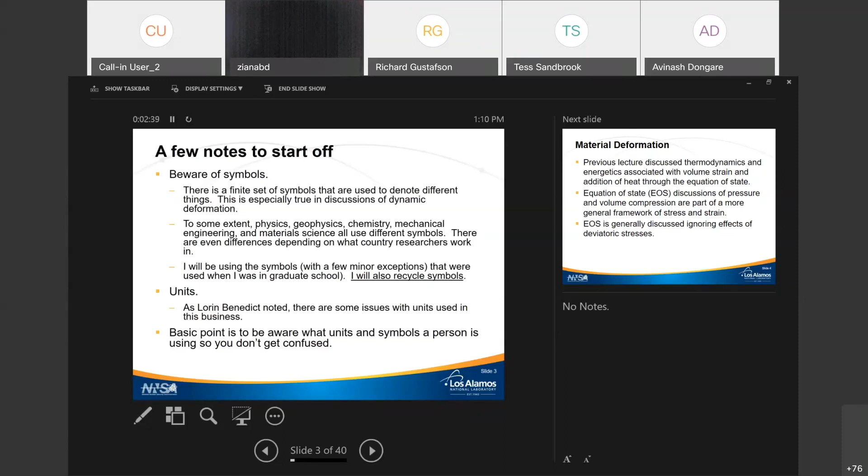Okay, so in the previous lecture, Lorin talked about thermodynamics and he talked about the energetics associated with volume strain and also the addition of heat in relation to the equation of state of a material. Equation of state usually involves pressure and volume compression. Those are specialized bits of the more general framework of stress and strain.

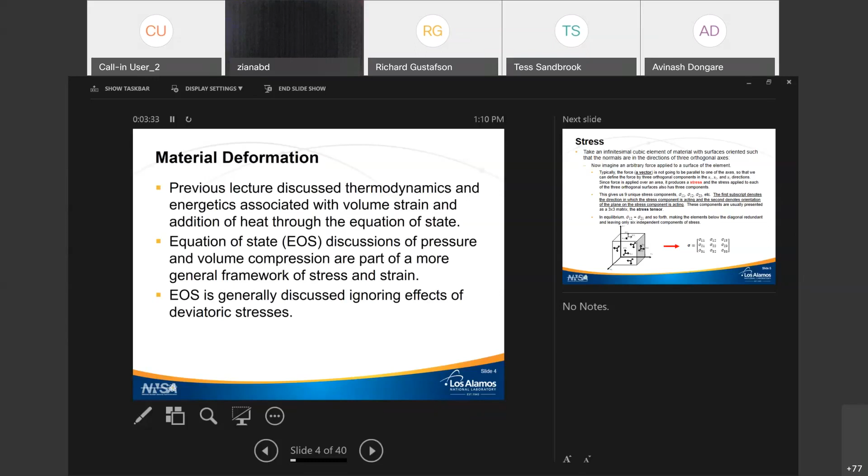The equation of state, as presented, generally ignores deviatoric stresses, and I think that some of the questions last week touched on that fact. This week, we will be discussing things that are dependent on the equation of state, but we go past that. So let's begin with stress. This is going to look very familiar to many people who've had a solid mechanics course, but in order to make sure that everyone ends up on the same page in terms of both the symbols and understanding what I'm talking about, I'm going to discuss stress and strain a bit first before talking about waves.

So imagine if you were to take a little cube of material and it's got surfaces, and the normals to those surfaces are 3 orthogonal directions. Lots of times lecturers will present them as X, Y, and Z, because when we get into talking about the matrices or the tensors that go along with these directions, generally they use numerical subscripts. I'm going to stick with the numerical subscript. So what would be X is going to be X sub 1. Y would be X sub 2, and Z would be X sub 3.

Now, if you take a force, keep in mind a force is a vector. It's got both direction and a magnitude, and you apply it to that surface, you end up with a stress. The stress is the force divided by the surface area. And because that force can be in any random direction, it typically isn't going to be aligned with one of our 3 orthogonal axes. And therefore, we can break that vector down into three components that are orthogonal in the x1, x2, and x3 directions.

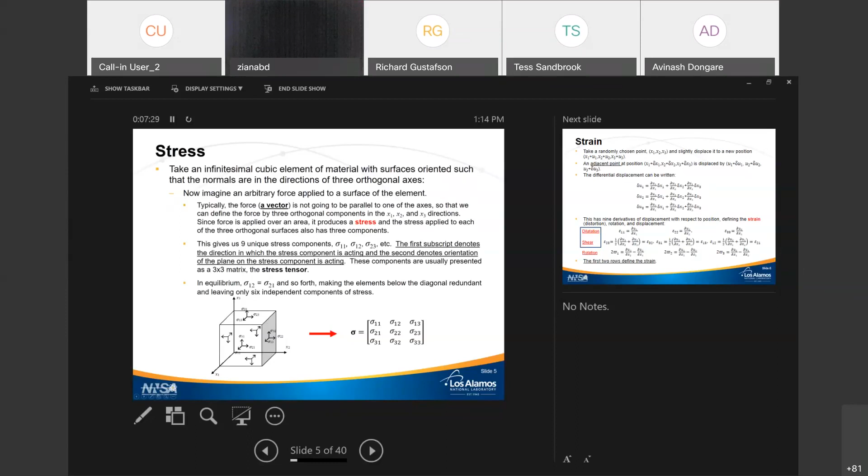Now, the whole purpose of what we are talking about in this course, we're talking about deformation of materials. I, in particular, am talking about the deformation of materials that results from stresses, and the deformation is called strain. So now, if we take our little cube of material and we pick some point inside that cube, and it has some position in our coordinate system, and we very slightly displace it. We displace it by a certain amount u1 in the x1 direction, u2 in the x2 direction, and so forth, and it ends up in a different place.

Now, if we take a point that's very close to that point, offset by delta x's in the 1, 2, and 3 directions, and we displace it, it will be displaced maybe by a very slightly different amount, so that in the x1 direction, instead of being displaced by u1, it's displaced by u1 plus delta u1. If we shrink these very small differences down to the limit, then we get differentials. And we can write these deltas as the partial derivatives.

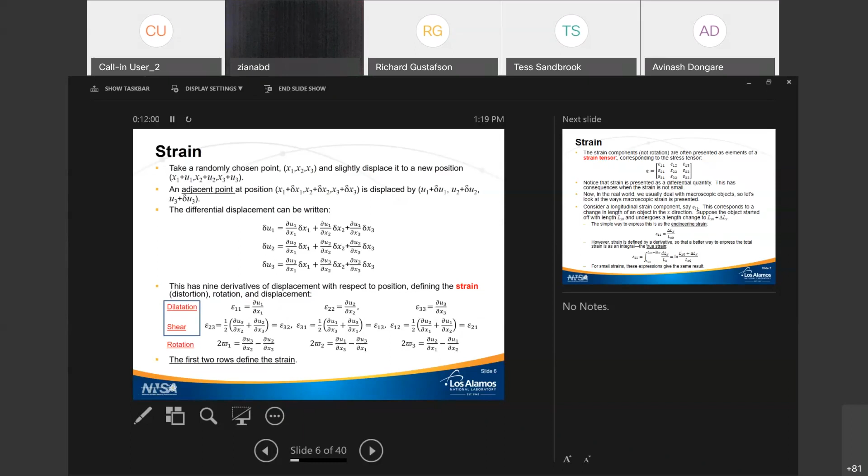So, as I pointed out, these things can go into a tensor. It looks very much like the stress tensor. The subscripts have almost the same meaning, because now we're talking about shears. But again, the plane that the force is being applied to, or in this case, the deformation is occurring in, is going to be the second subscript, and the direction of that deformation is going to be the first subscript.

Okay, strain is a differential quantity, and this has some consequences when the strain's not small. For most of this talk, we're going to think about situations where the strain is very small. Now, if we look in the real world, though, we deal with macroscopic objects. And so when you go read a paper where somebody has actually performed an experiment and presented a strain that has occurred in their sample, they're talking about something that's big enough to be measurable. And so just a very brief divergence from the main part of this talk

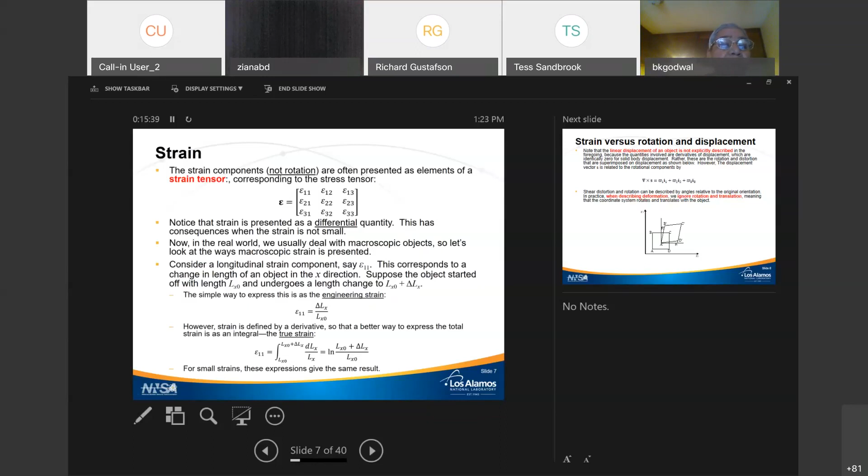The other thing I wanted to point out is that linear displacement of an object we aren't talking about. Rotation we aren't going to talk about, but this is just showing this is the displacement vector, and here's the curl quantity. It's related to the rotation. And that's all I'm going to say about it. We don't really need to worry about this for the purposes of this lecture.

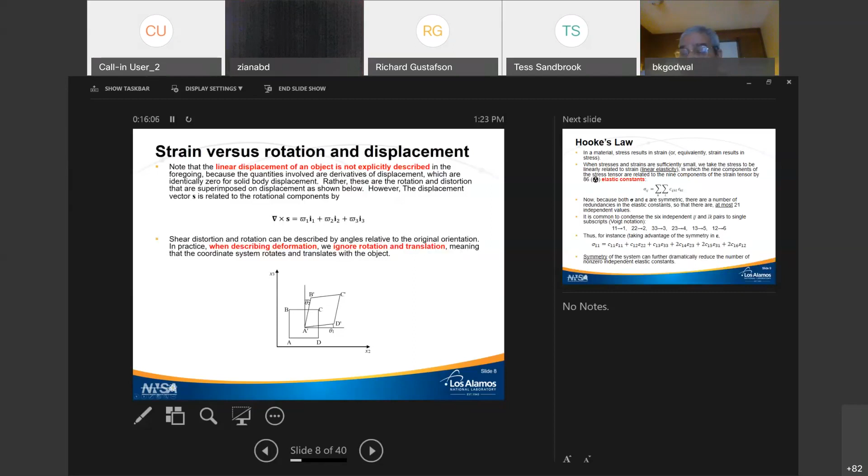Now, in high school physics or freshman physics, you probably dealt with problems where you took a spring and you stretched it or you compressed it, and you found that the force of that spring was equal to some constant called the spring constant times how much that spring was compressed or stretched. That is called Hooke's law.

Now, in solid mechanics, continuum mechanics, we have the same sort of issue where we can take stresses and strains and relate them by ratios. If those quantities are sufficiently small, then whatever that ratio is can be considered to be a constant. And we call that an elastic constant.

And when these elastic constants are constant, then we term that particular situation linear elasticity. Now, in linear elasticity, we take our two 3x3 matrices and we relate them. So each component of the stress tensor has a relationship to each of the 9 components of the strain tensor.

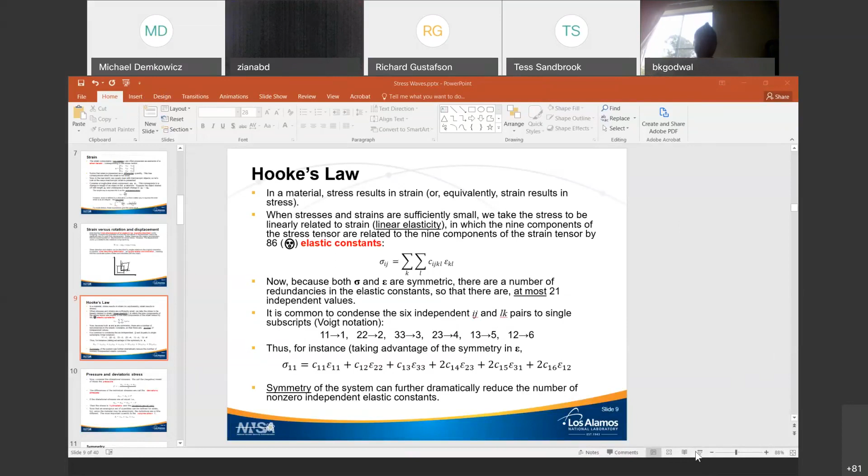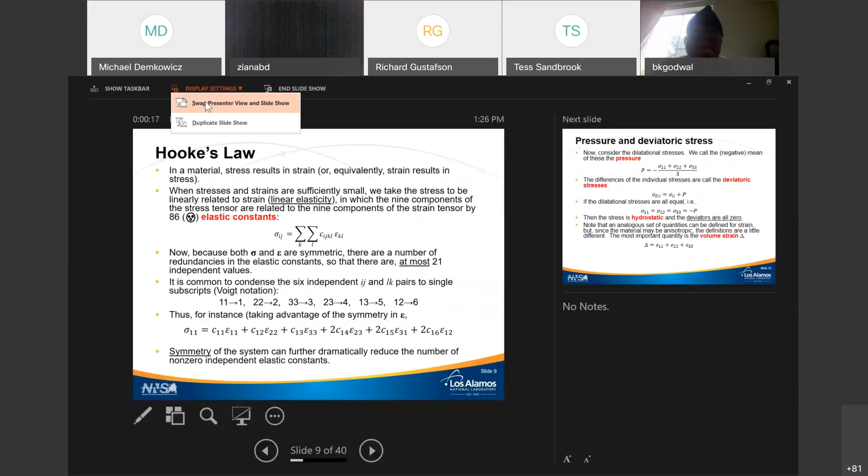And when you take that... Bill, do you mind if I stop you for just 1 second? We're getting a lot of requests to ask you to click on the display settings menu on top of your screen and swap presenter view and slideshow. So just start up the presentation in PowerPoint, enter the slideshow view, and on the top there should be a menu that says display settings. Press that and swap. Perfect. Can you see my cursor still? Yes, we can. Okay, because I'm using a double screen. Let me get things out of the way here.

As I was pointing out, the 9 components of stress are related to the 9 components of strain by 81 elastic constants, and that's a lot. The normal way is you take sigma sub ij, and it's related to each of the epsilon sub kl by a C sub ijkl. Fortunately, because both the strain tensor and the stress tensor are symmetric, a lot of redundancy exists in these elastic constants, so that there's actually only 21 independent values. That makes life a bit easier.

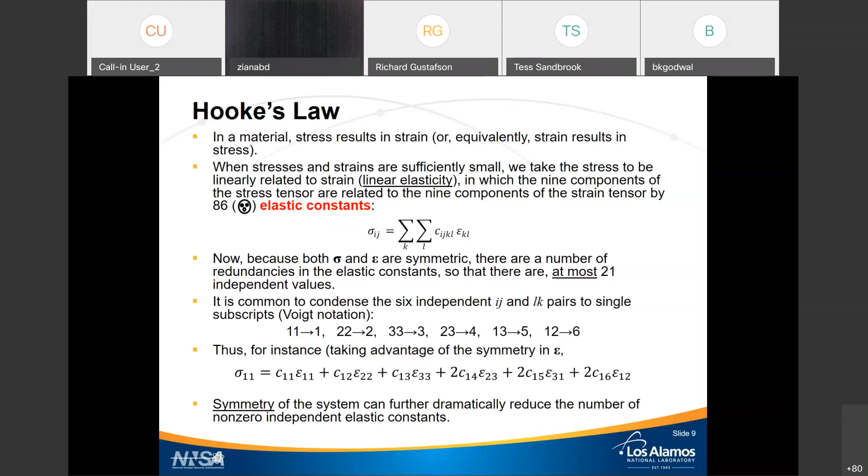One other thing I should point out is that in our everyday lives, we don't think about stress per se, we think about pressure. The pressure is related to the dilatational components of the stress. It's the average of the dilatational components in the 3 different directions. There's a negative here because in strength of materials, the convention is that stress and strain are positive when you're stretching or pulling on the material, and compressing a material, the stress and strain are negative.

We're going to change those definitions next week, but for this week we will stick with the convention people normally work in. The differences between these individual components and the pressure, keeping in mind that the pressure is the negative of these, is called the deviatoric stress.

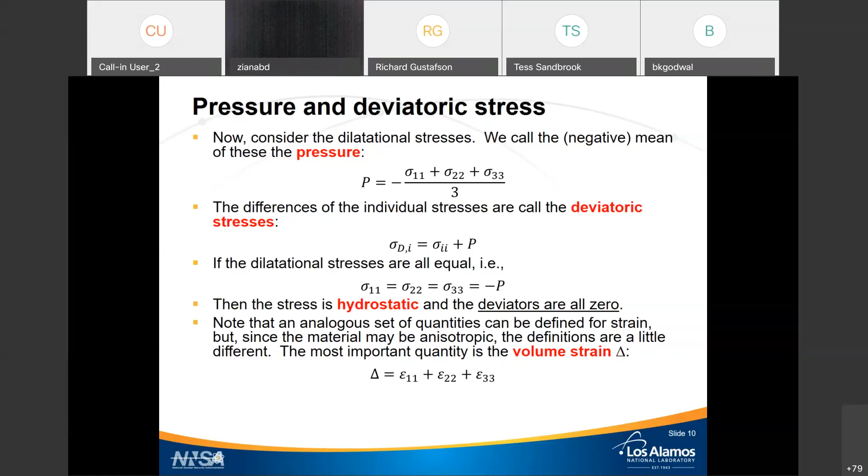Now, I said symmetry helps. In some cases, symmetry helps a lot. So if you have some material where there is no special symmetry, so in crystallography, we'd be talking about a triclinic crystal, where none of the crystallographic axes are orthogonal to each other, where none of the unit cell lengths are the same. So there aren't any repeated properties from one direction to another direction. You're just stuck with this thing not having special symmetry. In that case, you're stuck with all 21 elastic constants in order to completely describe the material.

Fortunately, most materials are not that asymmetric. Most materials that we deal with have inherent symmetries that result in some of the elements of the elastic constant matrix, which if you were to go in and add it all up, it's a 6 by 6 matrix. That's 36 separate components. Of course, like I pointed out, it is symmetric, but it results in some of those elements vanishing or being redundant.

In particular, there's actually quite a large class of materials that we call isotropic solids. Isotropic solids have properties that are independent of direction, and they only have two independent constants that we normally call Lamé's constants, and they can be expressed in terms of the elastic constants, C11, C13, C12, so forth and so on. You can see here, all 6 of these are equal to lambda. The 3 of these are equal to mu, and then lambda plus 2 mu actually equals these right here. And you might notice that these are the constants that correspond to dilatational strain in response to dilatational stress.

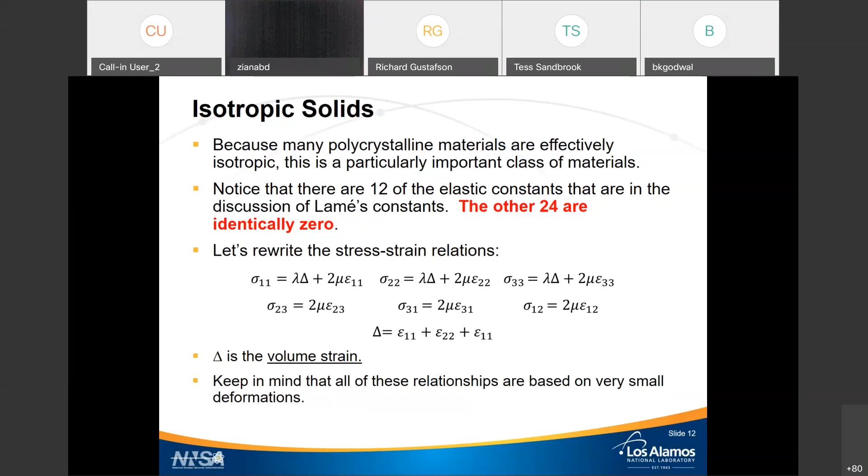Now, let's take a particular special case of an isotropic solid under what we call uniaxial stress. So we're going to take a block of material and we're going to squeeze it with a stress that's applied in only one direction, along one of our principal axes.

We're going to require the stresses on the sides to equal 0. Well, you know, if you take a marshmallow and you squeeze it with your fingers, it's going to bulge out. And so the lateral dimension is going to increase as the linear dimension decreases.

And it has those changes in dimension; the strains associated with those are going to have to satisfy this set of equations right here. The 1,1 component of stress is going to equal this, and the other 2 dilatational components of stress are identically 0. So you have to make all the different strains work together to satisfy these 3 simultaneous equations.

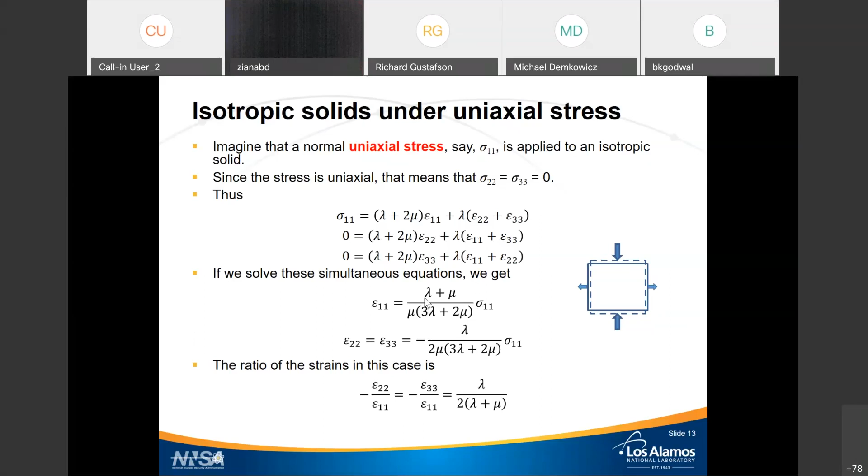Now, it turns out that these, while not really difficult, these particular equations have a lot of writing that goes along with them. So for convenience sake, it's common to define 4 elastic constants for isotropic materials. One of them actually is an elastic constant that applies to all materials, but right now let's stick with isotropic materials in terms of Lamé constants.

The first is Young's modulus, which is this right here. Second is the bulk modulus, and we'll be talking about it a good deal more. Third is the shear modulus, and it turns out to be exactly the same as our quantity mu. And finally is something called Poisson's ratio.

And if you go and look at what these ratios are, the Poisson's ratio is related to the differences in strain. Actually, those should be stresses. I'm sorry, I have made an error there. Oh, I'm sorry, I'm getting ahead of myself. The Poisson's ratio deals with the ratio of the lateral expansion of the material, if you will, to the longitudinal contraction. And Young's modulus is just the ratio of the stress to the strain.

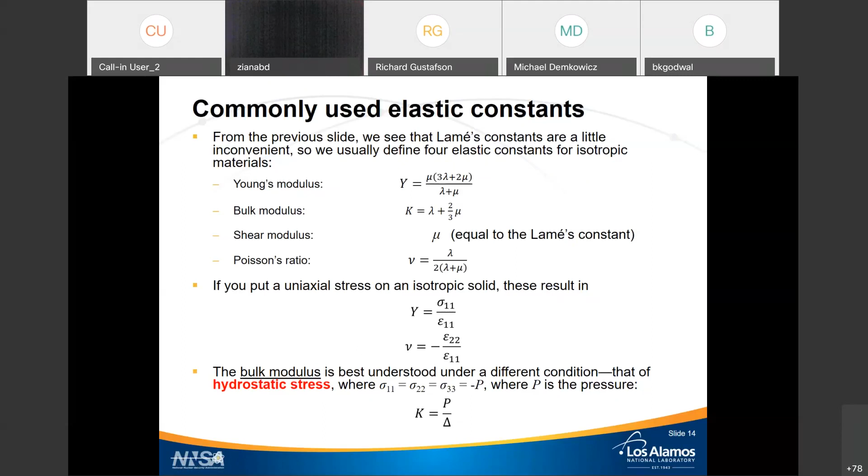Now, there's a different condition called uniaxial strain. In that situation, which is the normal situation when we're dealing with stress waves, you have some extended material. You've got a big chunk of material, and you're dealing with what's going on inside of it, where if you squeeze it in one direction, it's surrounded by more of the same material, so things can't get squished out the side. Therefore, the strains in the lateral direction are 0, and the strain in the longitudinal direction is non-zero.

Well, now you have to simultaneously solve the equations that will give you that. So what you'll have in a situation like that is the longitudinal stress is going to look like that, and the lateral stress is equal to that. Notice that all the other strains, 2,2 and 3,3, are 0, so they don't enter in there.

And in terms of our elastic constants that I said are a bit more convenient, the longitudinal stress is related to the longitudinal strain by this quantity here, which involves the bulk modulus and the shear modulus, and the lateral stresses are related to the longitudinal stress by this ratio involving Poisson's ratio.

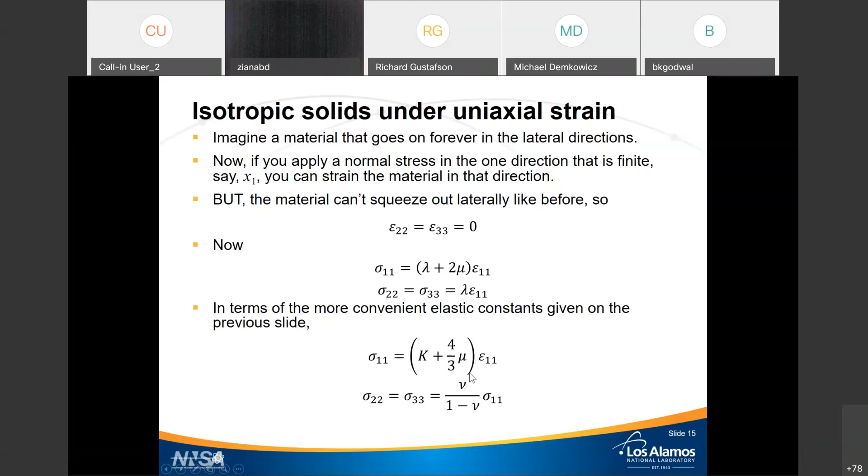Now, not all materials are isotropic. So let's talk briefly about the next step up in asymmetry. There are materials that are called orthotropic solids. An orthotropic solid has 3 orthogonal planes of symmetry, but the properties may not be the same in those different directions.

I'll just mention that, of course, a very large set of materials, for instance, lots of salts, lots of metals, are isometric. In other words, their symmetry is cubic. They have 3 fourfold rotational symmetry axes, and the properties along those different axes are the same.

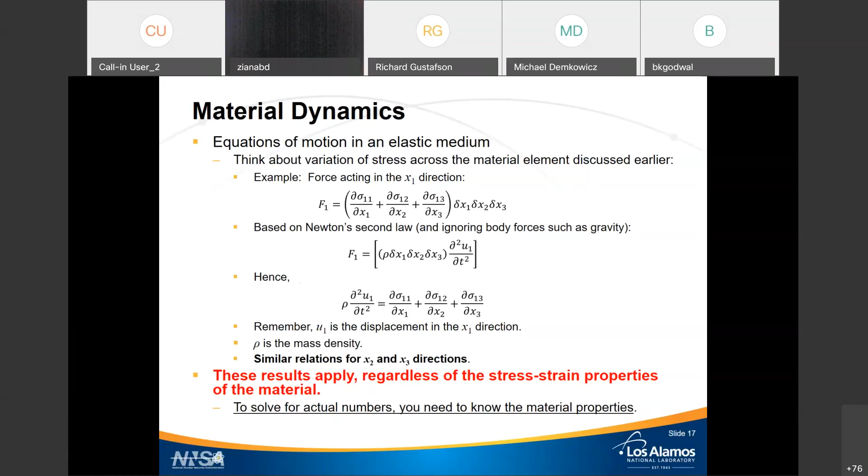Now, what happens if we have something that obeys these equations and we do the following? Let's take a block of this material, and only on one surface, not on the opposite surface, so now we're going to have an unbalanced situation. Only on one surface, we apply some time-varying force. Okay, because that stress is unbalanced, that's a net force, things are going to move. We accelerate the material. So the atoms at that surface are accelerated, they move, so that there is a corresponding time-varying strain.

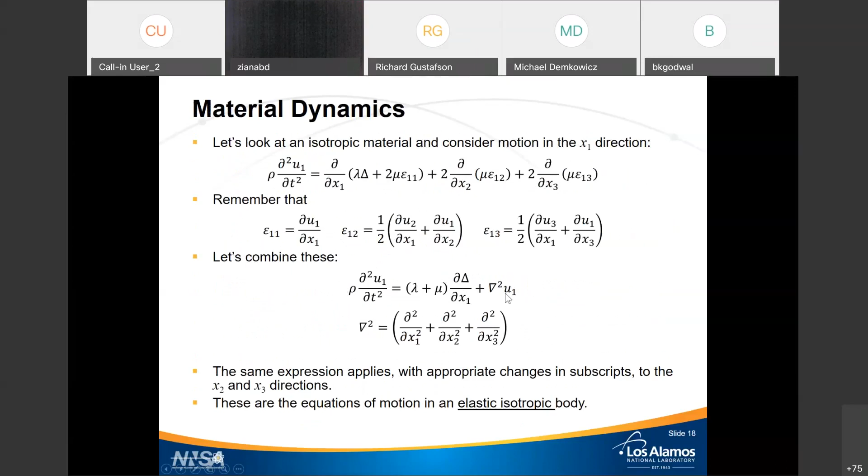That is a wave. Now let's look at this wave in terms of those equations of motion that we had on the previous slides. Now, if we take all three of those equations of motion, in the x1, x2, and x3 directions, and we differentiate them with respect to x1, x2, and x3 in those three directions. So for instance, this one would be differentiated with respect to x1. We differentiate them, and we add them all together, and you get something that looks like this.

Here, remember, this is our volume strain. We've got Lamé's constants here. You may remember that this is what the stress looked like relative to the strain in the uniaxial strain condition. And for those of you who've done a lot of electromagnetism work or dynamics work, you might recognize this as being the wave equation. A second derivative of some quantity with respect to time is equal to some constant of proportionality times the second derivative of that same quantity with respect to position.

In this case right here, this is a wave equation where dilatation is moving through the medium with a velocity that's equal to this quantity right here. And you'll notice this right here is our stress again, or our stress ratio to the strain. Here's our mass density, and it's a square root.

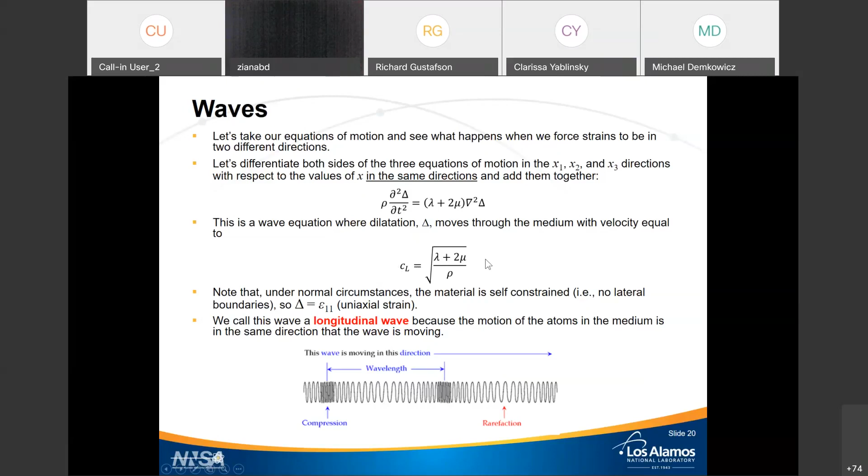And since it's a longitudinal wave, that's why I called the velocity C sub L. Now, because the lateral strains are zero, and the lateral derivatives therefore are zero, we can think of any particular localized portion of the wave as planar. And so we can now write that wave equation to look like this. The general solution for that wave equation is going to look like this. Keep in mind that waves don't have to be sines or cosines. There's a general solution that involves a spatial position plus the wave speed times a time position. And there are two possible solutions, one for waves propagating in the positive direction, and one for waves propagating in the negative direction. What you can see is, except for a constant offset and, of course, the scaling factor.

Let me see here. Okay, for whatever reason, my cursor moved on me. Can you still see the cursor? Not anymore. Okay, let's see here. I'm not sure what I did. Let's go back. Okay, my cursor went away, so I'll have to try and make things clear enough as to what I'm pointing at.

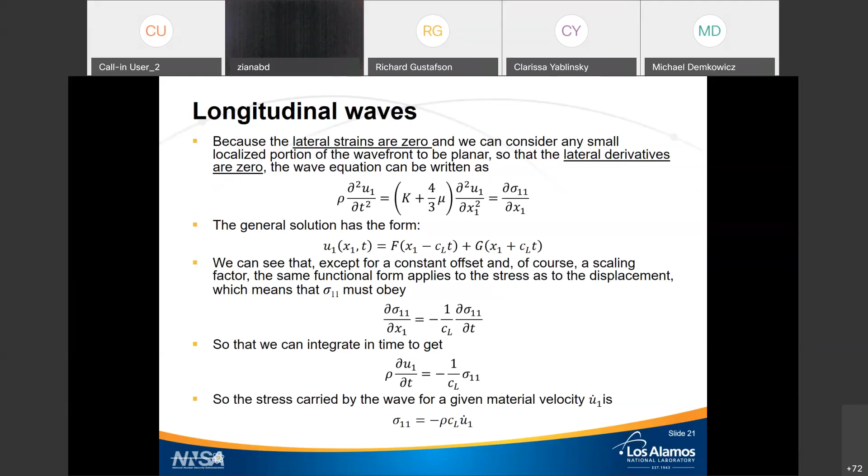Now, what about the case where we force the volume strain to be 0? So there's no dilatation to speak of. If you do that, then you have these equations up at the top that relate velocities, or actually accelerations, in the U1 and the X1, 2, and 3 directions to the spatial derivatives of the velocities.

Now, because of the way that the full equations of motion work, and because the material is self-constrained, we can't have longitudinal strain. What we will get is another wave equation. These are all wave equations, but they have a different propagation velocity, equal to the square root of the shear modulus divided by the density. Those are called shear waves.

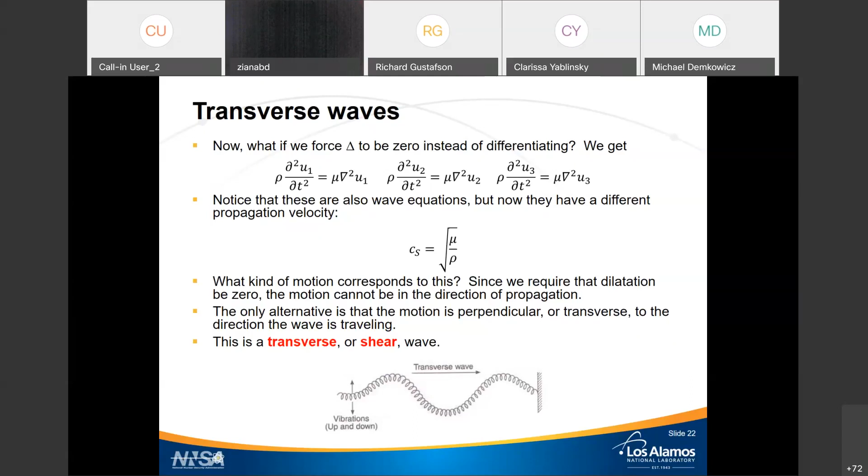Now, imagine a longitudinal wave carrying a longitudinal stress, sigma, in an isotropic medium. What are the stress deviators? Okay, in an unbounded medium, the stress deviators are essentially 1/3 of the total stress. In a bounded medium, and our self-constrained medium, the uniaxial strain case, the stress deviators have to basically balance the amount of expansion you would have gotten, and we dealt with that earlier.

The lateral stresses must exactly equal the stress required to balance the lateral strains so that there are no lateral strains. And so you have the material squished in one dimension. Now, because there is a difference in stress between the longitudinal and the transverse directions, there is an inherent shear stress and also shear strain at the microscopic level that go along with this.

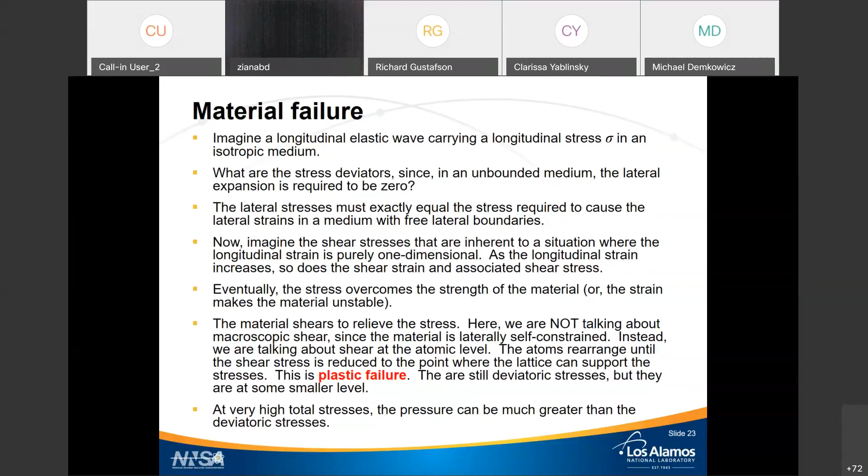At very high total stresses, think very high pressures, quite often the pressure is much greater than the deviatoric stresses. And in such situations, as you will find out next week, it's common to ignore deviatoric stresses. But in a material that has failed plastically, where if you try to apply more shear stress, the material just flows, then it's behaving like a fluid rather than a rigid solid. This condition translates to the shear modulus being equal to 0.

In that case, the shear wave or transverse wave velocity would be 0. So there is no transverse wave. And the longitudinal sound speed becomes this quantity c, which is the square root of the bulk modulus divided by the density. That's a bulk wave. Bulk waves occur in fluids. They're really the only kind of body wave or interior wave that a fluid can support, but they also occur in solids that have failed plastically.

Okay, I've talked about mostly isotropic materials. I should point out that, and I think I left off a few terms in the example of the orthotropic solid here, if you take a material that has properties that depend on direction, then wave speeds, stresses, all those things will also depend on direction. And the strains, the wave speeds and all are going to be related to the stresses by whatever set of elastic constants applies to that material.

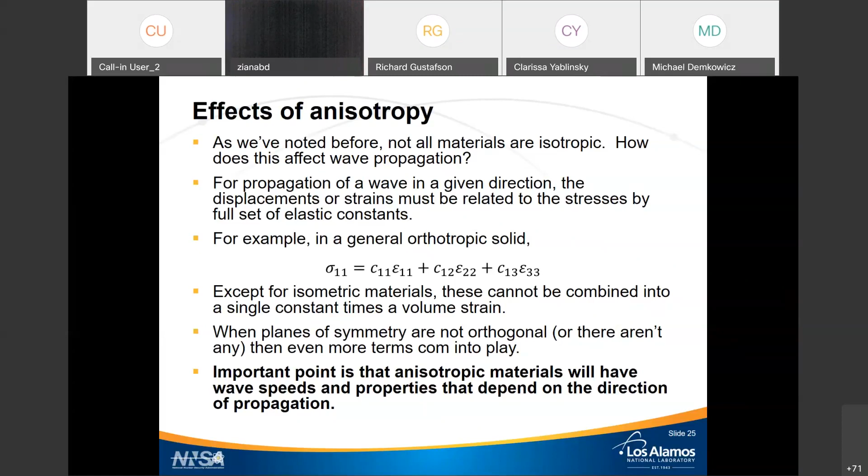The important point here is that anisotropic materials exist, and they will have wave speeds and properties that depend on the direction of wave propagation. Now, materials don't go on forever. Sooner or later, a wave hits something. Either it hits another material or it hits the edge of the material it's going through, and there's nothing beyond that. What happens to the atoms, to the wave?

Say it hits what we call a free boundary, where the last layer of atoms in the material is all there is. There's nothing beyond it. The wave can't just disappear. It's carrying energy. It's carrying momentum. It cannot just disappear. But at the same time, at that free surface, there's nothing beyond it. There can be no stress where there is no material. And so we have to think about, how does the material behave when it hits that boundary?

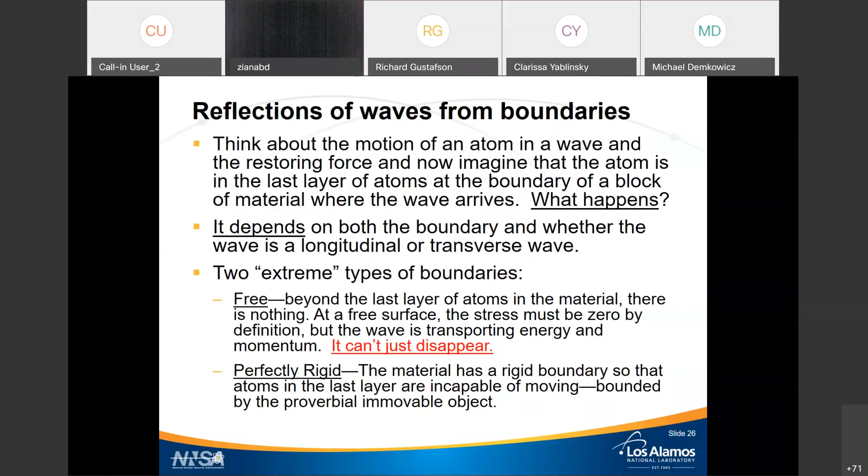Sort of the extreme opposite is, suppose that you could have the proverbial immovable object that something is up against. So the material is so rigid that it is incapable of moving in response to a stress. What happens? We'll call that a perfectly rigid, or sometimes called a fixed boundary. There are 4 situations: longitudinal waves with a free or fixed boundary, and shear waves with a free or fixed boundary. Let's start with the longitudinal waves.

I was going to put a movie in here, but I realized that because of time, this was going to be a long lecture anyway. I apologize for that.

If you take, let's say, a wave that has compression to it, so it's squeezing atoms closer together, it's a longitudinal wave, and it is propagating in some direction, and it hits a free surface. What does it do? Well, let's think about things at the atomic level. That last atom, or last layer of atoms at the surface, is pushed on, if you will, by the atoms deeper down, because as they move, they change the potential well that the atom is sitting in. And so it moves. It moves out away from the material. Now, because it doesn't have any other atoms that it is going to push on, the potential well is only half as deep as it normally would have been if it were sitting next to atoms beyond it.

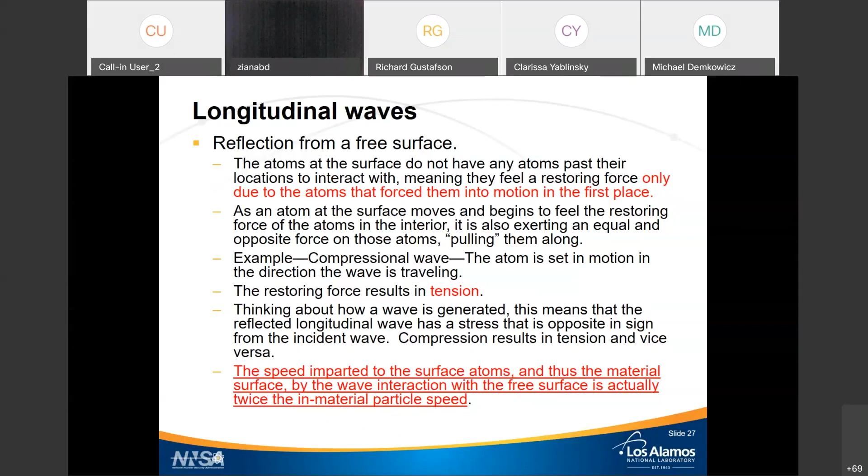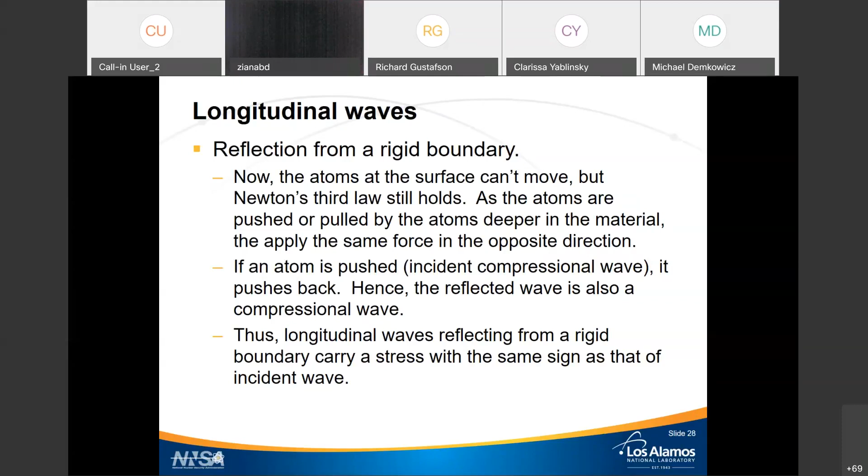What about shear waves? Okay, now at the surface, say a free surface, the atoms now are not forced out of the plane of the surface. They're forced sideways. Again, the potential wells that they feel are only half of what they would be if they were in the middle of the material. So they continue moving past where they would stop.

And as you might expect, they're going to be forcing the atoms deeper in to move that same direction. So that when the wave is reflected, the sense of motion, the direction of motion of the atoms in the reflected wave is the same as the motion of the atoms in the incident wave. So that's the opposite situation from a longitudinal wave. The reflected wave has the same sense of motion to the person standing there watching the wave, if you will,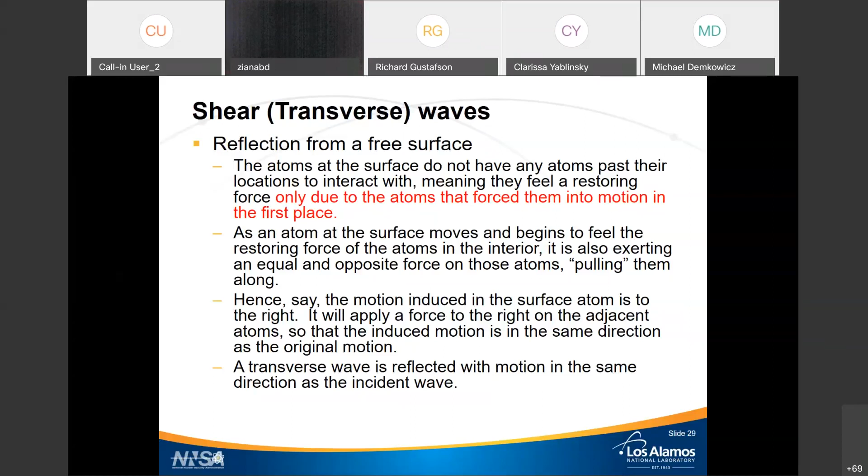as the incident wave. Now, there are some niceties that because the wave is actually moving in the opposite direction, it's really the negative, but for our purposes, just realize that the motion, the sense of motion in the material is the same in both the incident and reflected waves when the wave reflects off a free surface. And without going into a big long discussion as to why, you can imagine that the reflection from a rigid boundary is going to be the opposite.

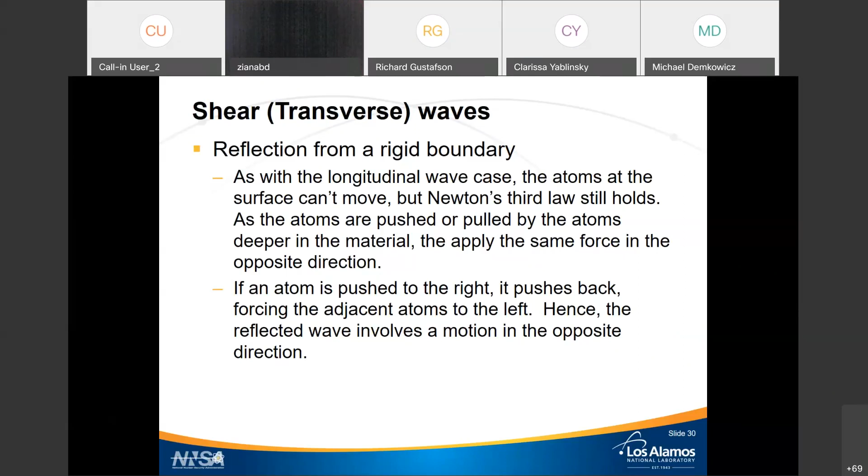So the sense of material motion is different in reflections involving shear waves and longitudinal waves. Okay, now, what about when you don't have either of those two extreme cases? You've got something like aluminum next to copper or rubber next to steel or whatever. What happens then? Well, you can't really rely on either of these two situations.

The property that determines how a wave will be reflected, and also transmitted, which is an important thing, is something called the impedance. The impedance is the ratio of proportionality between the change in stress and the change in material velocity caused by the wave. So remember our longitudinal wave, it's this delta sigma, because it can be a change in stress. Nobody said the original stress was 0 now,

is equal to minus rho CL times U, where I have started to recycle symbols now. Instead of U dot, where U is displacement, I'm going to be calling velocity, material velocity U. I apologize for that. That's just the way life is in this business. So the impedance in this material is minus rho times CL.

At an interface, there are two things that have to be equal. The stress, really the normal stress, should be continuous. Really, I'm going to mainly deal with normal stresses and longitudinal waves, plus the material velocity has to be continuous. And as I pointed out, this is always going to be the case if we're dealing with motion normal to the interface. In the case of shear, these requirements only apply if the two materials can't slide past each other, and that's what's called a no-slip condition.

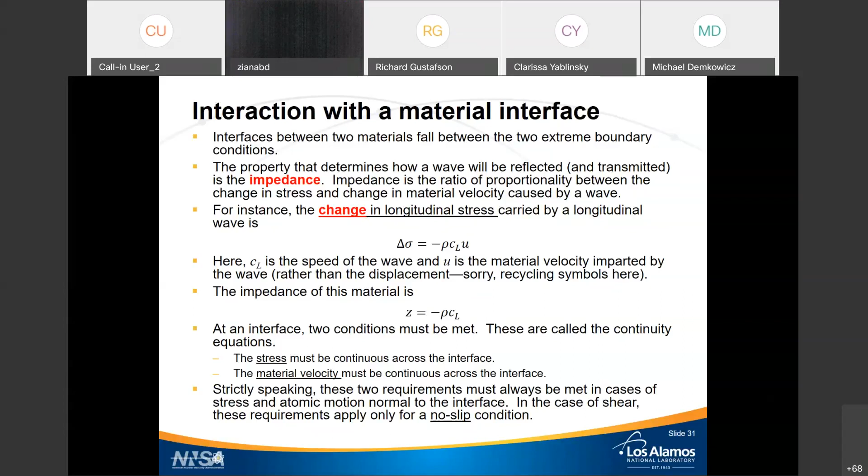So for a longitudinal wave, at the interface, the incident wave will be partially transmitted and partially reflected. Whether or not the resulting waves have a total stress amplitude that's higher or lower than the original wave that hit the interface, the incident wave, depends on the relative impedances of those two materials.

For a longitudinal wave with impedance Z1 in the material that the wave is coming from, the final stress has to equal Z1 times U sub I, where U sub I is the material velocity due to that original incident stress, minus delta U1, where that's the change in velocity in U1, and that has got to equal the impedance in the receptor material, the material the wave is going to go into, times U sub I plus delta U1. Why is that?

The reason for that negative sign is because in that material, the wave is going back the way it came, the reflected wave, whereas the transmitted wave is continuing on in the original direction. So that's why you have a negative on the left-hand side there.

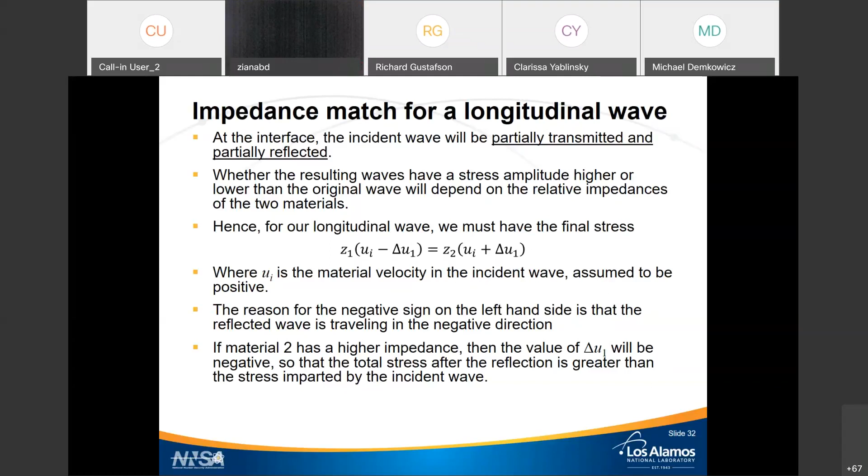Well, I've mentioned this primarily in terms of normal. So I really have been discussing waves propagating normal to the interface. What happens if that's not the case? The wave is coming in at some angle. In the case of longitudinal waves and one polarity of shear waves, you'll get both normal and transverse components of the material velocity relative to the interface. And that results in something called mode conversion.

So if you have a pure longitudinal wave coming in, what happens is at the interface, the velocity components associated with the material motion have both transverse and normal components. And so you produce both normal and transverse waves in reflection and transmission.

Unless, of course, the material that the wave is going through can't support shear stresses. It's a fluid. This is actually a common situation in seismology for those of you who are geophysics aficionados. Seismic body waves encountering a boundary in the Earth, because most of them come in at oblique angles, undergo mode conversion. And this is how we originally found out that the Earth has a solid inner core.

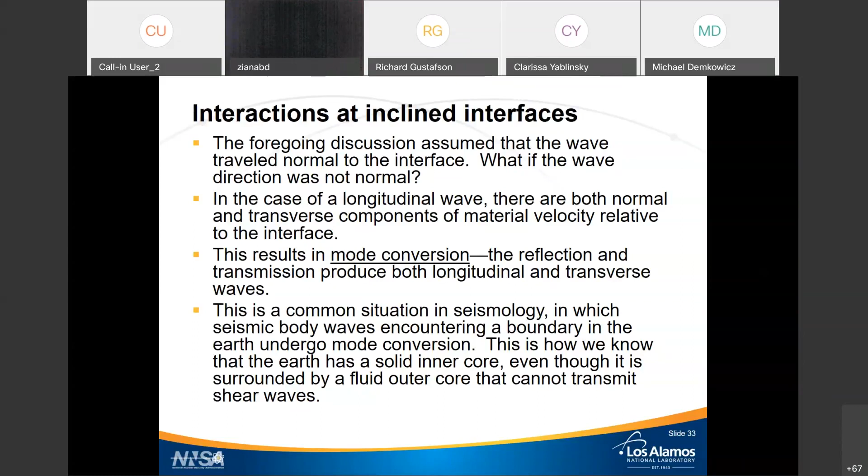Okay, so we've talked about very small displacements, so that the elastic constants are assumed to be constant. However, if the amount of strain of a material is finite, then the restoring forces that give rise to the elastic constants, and thus the elastic constants themselves, also can change. For example, let's take the bulk modulus. Remember I said bulk modulus is actually a thermodynamic quantity.

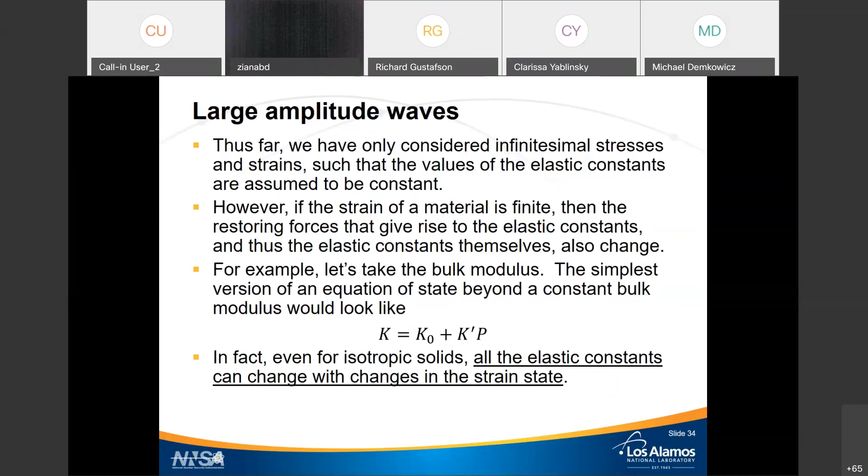The simplest version of an equation of state, or at least the compressional part of an equation of state, beyond just assuming that bulk modulus is constant, would look something like this. The bulk modulus is a constant plus some constant derivative with pressure times the pressure. Even for isotropic solids, all the elastic constants can change with changes in the strain state or stress state.

So let's take a material that's a fluid. Life is simple. The same applies even if it's a solid. But to make life simple, we'll talk about a fluid, so we don't have to worry about the shear part of the situation. Longitudinal, bulk sound speed in the material is given by this equation. Now you notice I put a subscript S on K.

Processes in elastic waves and waves in general, except for a few special cases, are generally fast enough so that heat transport can be ignored. It's basically adiabatic. There is no heat transfer. And if the wave is elastic, this is also isentropic, so we use something called the isentropic bulk modulus. There's another bulk modulus out there called the isothermal bulk modulus. That's the bulk modulus you would have dealt with when using the Helmholtz potential that Lauren dealt with last week.

Now, let's take a wave that has some finite amplitude, make it a compressional wave and run it into the material. And it has a finite rise time, so it's a ramp. If you look at pressure or material velocity or anything like that, as the wave propagates to the right, it undergoes an increase in any of those measures. Let's call it pressure for now. And let's imagine, as we did with Lauren last week, that our ramp is actually a lot of little bitty steps, each one with a pressure increment delta P.

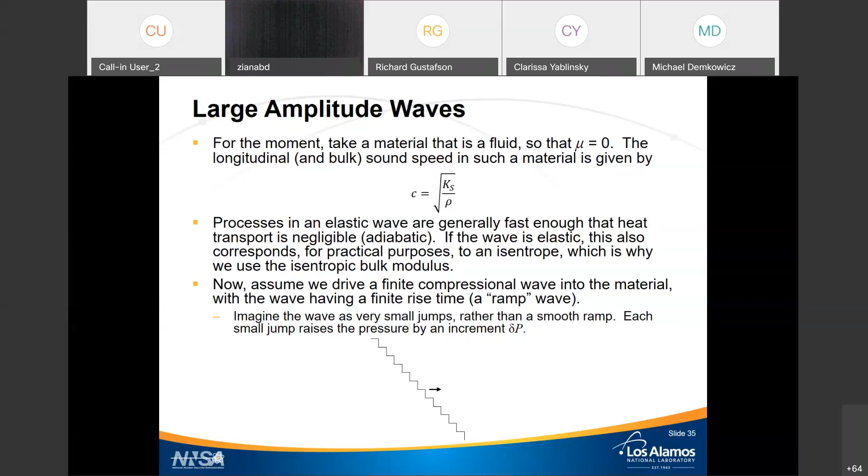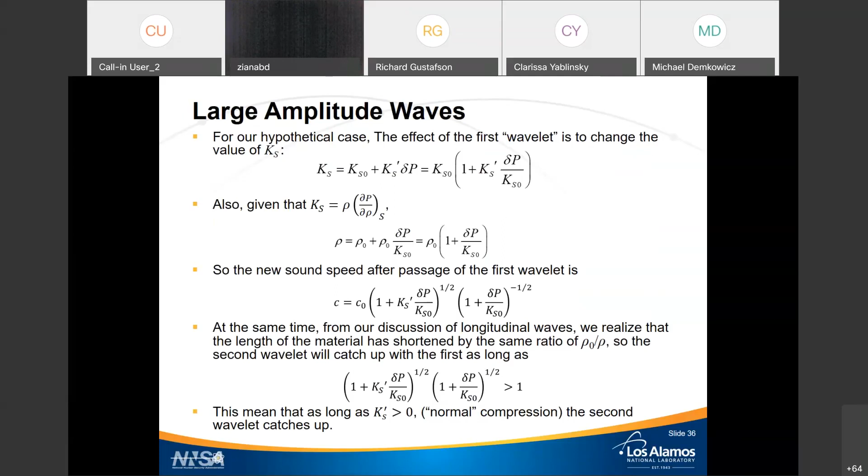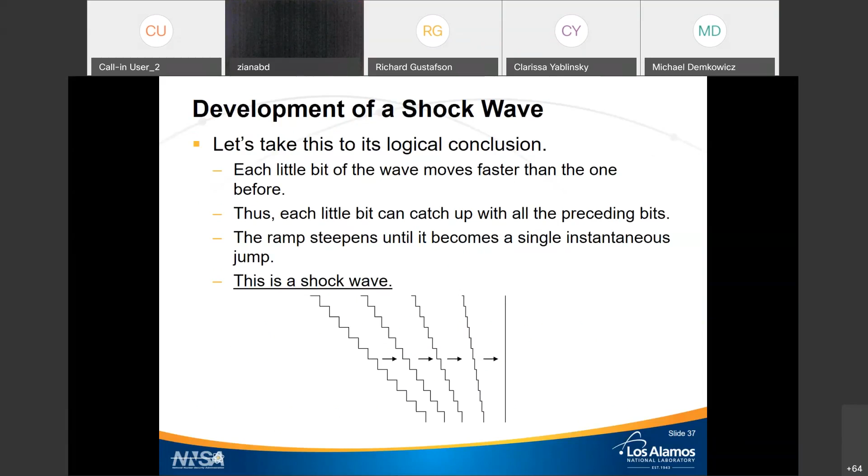But let's take this to its logical conclusion. Each little bit of the wave moves faster than the one before. So each little bit can catch up with all the bits that went before. And this wave, as it propagates, will steepen up until it becomes a single instantaneous jump. That's a shock wave. Now, in the real world, things are more complicated, but we'll leave the complications until next week.

Well, what about decreasing pressure? Well, if you have a material that has normal compression behavior, normal compressibility behavior, the exact opposite happens. If you take a wave that is a drop in pressure and you run it through the material, it actually starts to spread out.

But what about this anomalous compressibility? What if K prime is actually less than 0? Well, you can end up in a situation where a rarefaction shock, a shock wave with a negative pressure jump, forms. And at the same time, if you put in a shock wave that's a positive wave, it'll actually spread out.

One of the important examples that has been used for many years in the dynamic compression community before the advent of some of the modern facilities that we have was fused silica, basically quartz that's been melted and turned into a glass. It turns out that fused silica has anomalous compressibility, and a common technique to generate a high amplitude in terms of pressure, we're talking several gigapascals,